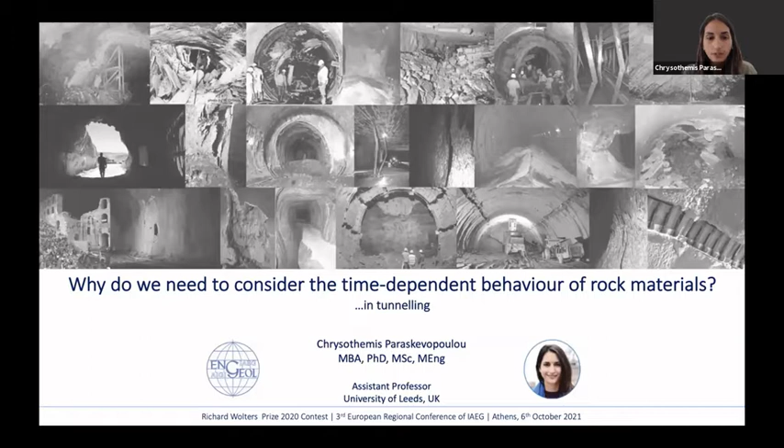Good. So hi everyone, good morning and good afternoon. I will be talking today about why we need to consider the time-dependent behavior of rock materials in the field of tunneling. This presentation is based on key contributions from three submitted articles for this prize, which I'm very proud of. But first, we need to understand the challenge.

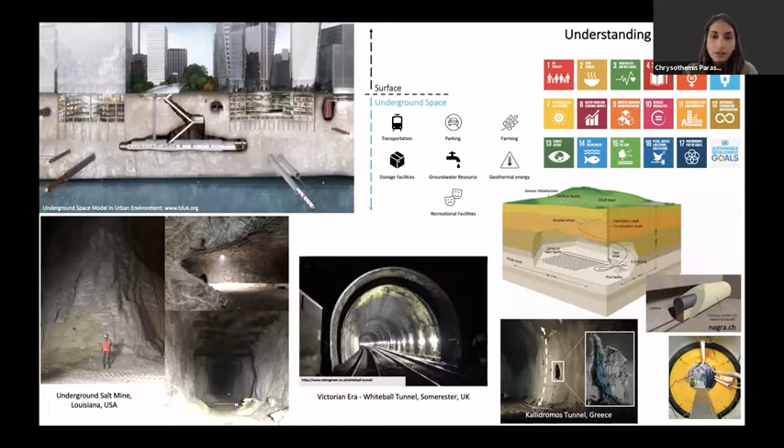You can all agree that underground space has become an integral part of our everyday lives. We use it for transportation, parking, storage, energy, and other activities. But it's time to rethink and reconsider how we design underground structures today, especially when we are requested to design structures that exceed the common lifetime of infrastructure—100, 150 years—to 1 million years. It's also time to reconsider how we can reuse and repurpose existing abandoned underground spaces, prolong their lifetime, or sustain our cultural heritage, like Victorian tunnels in the UK where I'm based.

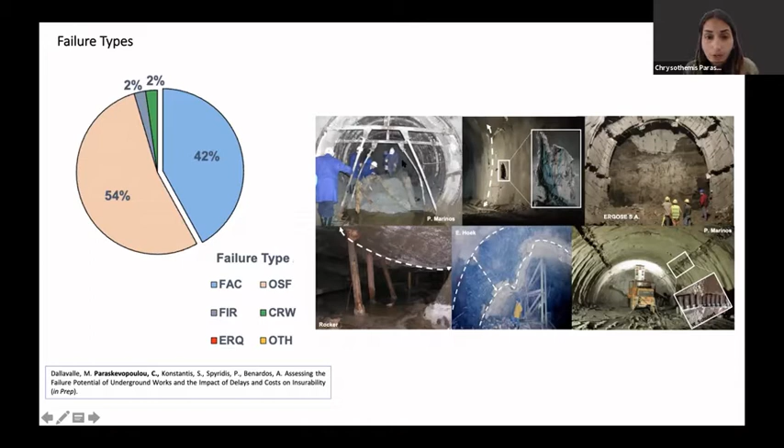Tunneling is associated with failure types, and from a recent publication we've seen that the most common ones are face instabilities and failures due to overstressing of support. Others could be fire, ground failures, earthquakes, and others, but those two, as you can see in the pie chart, govern the main failure types. These are all examples of tunnel failures due to time effects.

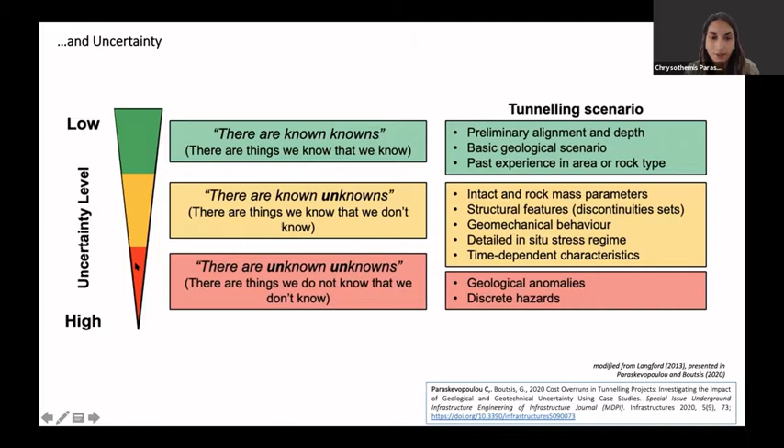So how can we do that? We need to investigate time-dependent phenomena. Time-dependent phenomena can be due either to a change in the state or a change in the property of materials over time. In a tunneling environment, we can see them as physical responses due to creep, consolidation, dilation, swelling, stress relaxation, and strength degradation.

I'm only focusing today on three of these: creep, stress relaxation, and strength degradation. Creep is the time-dependent deformation of rocks and rock masses subjected to constant stresses. Stress relaxation is the time-dependent stress decrease while at least one principal strain is constrained. And strength degradation is the loss of strength due to time.

It's important to highlight that the observed displacement on a tunnel wall, which we can see on extensometers, can be the product of these physical responses that either act simultaneously or individually. So we need to start separating and understanding what we see in this extensometer data.

It's important, and geology matters here, to understand how the materials were formed and how they're going to behave under different conditions, from brittle to ductile materials. How do we do that? By doing testing in situ or in the lab. I'm only focusing on lab testing here.

We need to first set a baseline by doing UCS tests and determine the different stress levels, like crack initiation, crack damage, and UCS. Once we have this baseline, we can change the testing conditions and see how the materials behave over time, looking at creep and relaxation behavior.

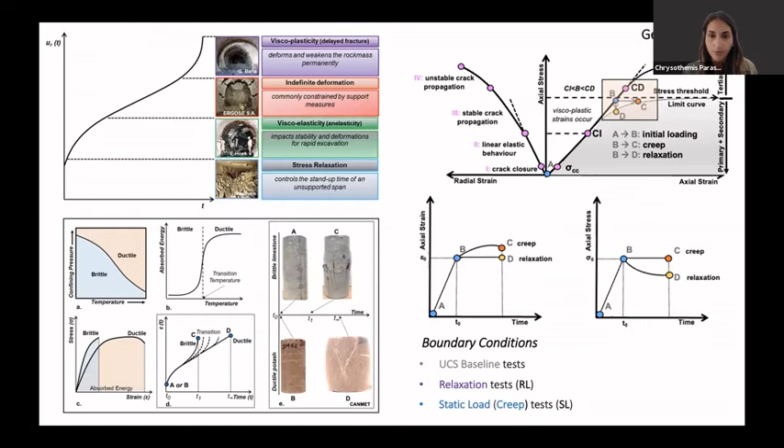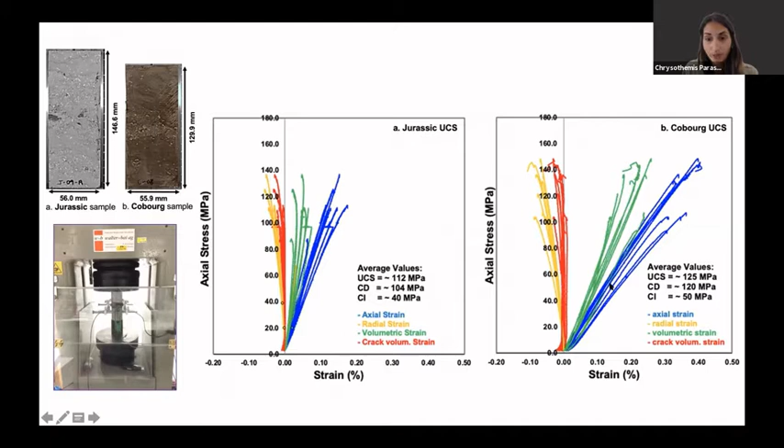In this example, we have two different types of limestone, Jurassic and Cobourg. You can all see from these two graphs that we are talking about strong, brittle materials, and some of you might assume that these are not going to be time dependent.

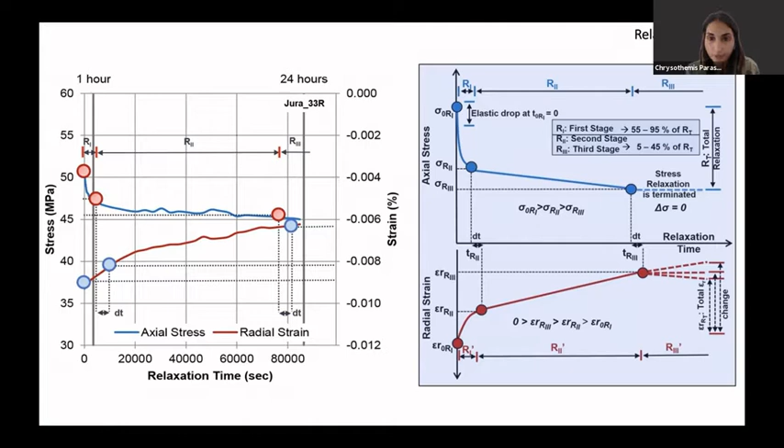If we compare the data with literature review data, then we can start making a database, and by knowing Young's modulus and CI, we can have a better idea of the maximum stress relaxation anticipated.

But the other information we can get is the long-term strength. So we have the short-term strength, which is related to the UCS, and this can decay and degrade over time to the long-term strength, and the lower strength limit would be CI.

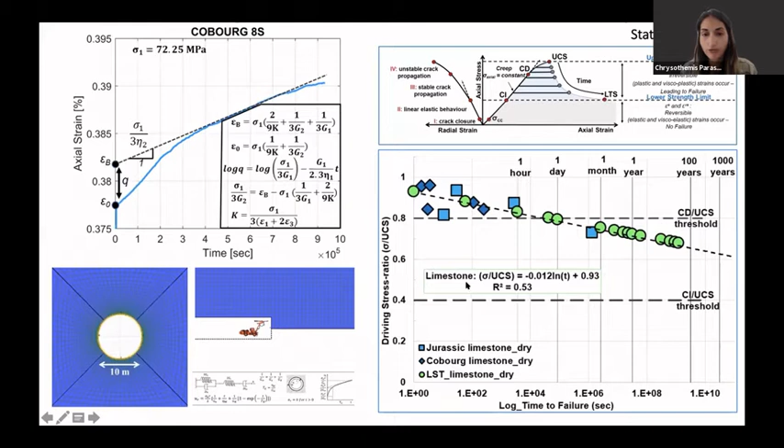So for limestone, by deriving stress ratio versus logarithmic time to failure, we can get these kind of curves, linear here, but logarithmic, where we can use this formula to have a better idea of the long-term strength of such materials.

The observations we made from this testing series was that when the materials are subjected to 80% of the UCS and above, there will be an inevitable failure, crack interaction failure. Between 80 and 40%, failure will occur, but at a later stage, depending on the stress level and the mineralogy. And below 40%, there will be no failure.

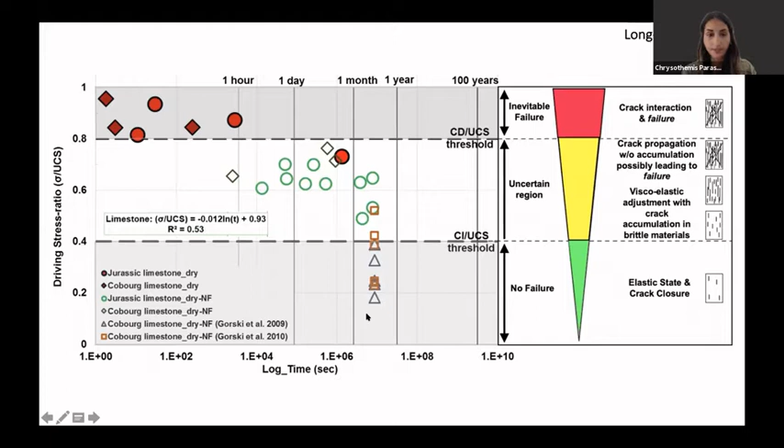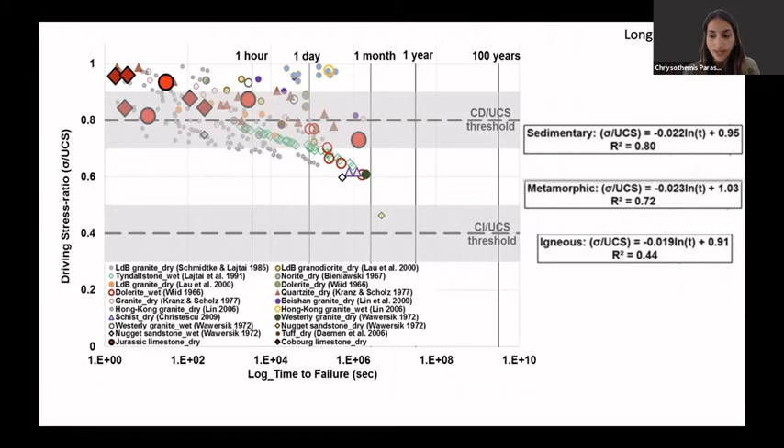When we again compare this dataset with literature review, we can see that they all follow a general, similar trend. If we consider them by different rock types, we can get some formulas that give us a better idea of the long-term strength based on sedimentary or metamorphic rock, even for initial design.

Astonishingly, here you can see what someone would assume, or what is accepted, that granites, most granites, are stronger than limestone, at least these ones that we are looking at here. However, in the short-term strength - however, in the long-term strength, we can see that this trend is reversed. So the limestone can withstand, can have higher long-term strength than granite.

And the reason why is that granite is a polymineralic material, so different minerals, different viscosities, different flow rates that will damage and lead the sample to failure sooner than the monomineralic material of limestone. So this is something to also consider.

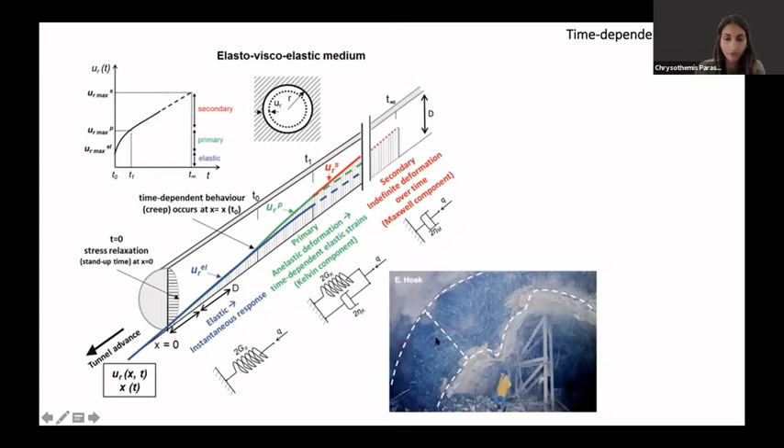If we put this into a numerical framework simulation, we can examine, and right now we are able, with the tools that we have, to consider not only the tunnel advancement and the time effect due to viscoelastic models, but also the duration of each excavation cycle.

So we have real-time simulations, and we can understand how we can go from the elastic to the maximum tunnel displacements, depending on the excavation cycle that we are dealing with. And we can do that both for drill and blast and TBM methods.

What is important to say here is that creep is starting one excavation cycle after we have crossed the face, which is something that we saw both in drill and blast and TBM tunnels.

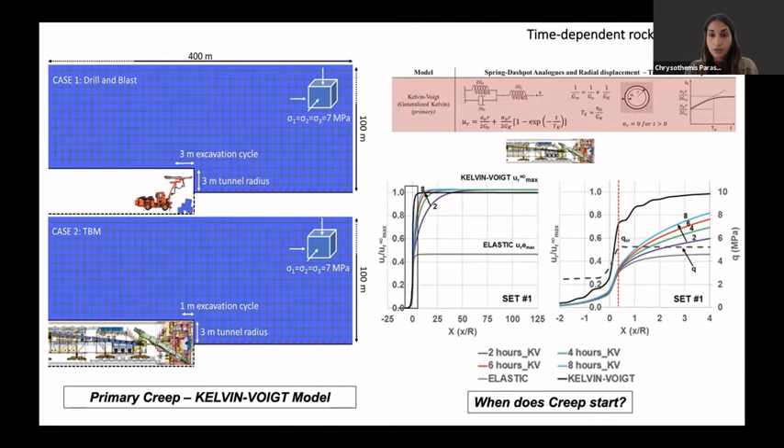So to conclude, I have to say that right now we do have the scientific tools to create practical tools that engineers, engineering geologists, and practitioners can use to take into consideration this time effect in tunneling and in geoengineering in general. I have shown you, from the three publications, key contributions and some key observations from the stress relaxation, creep test, static load test, strength degradation, and long-term strength, and how we can consider time effects in tunneling.

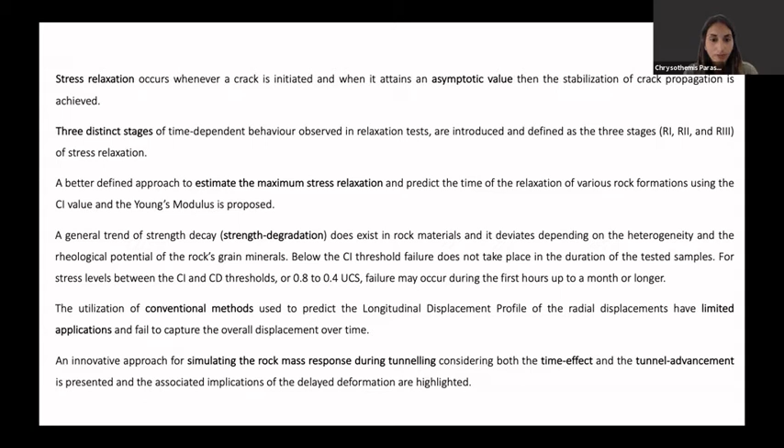So thank you very much. And if you have any questions, I'm happy to answer.

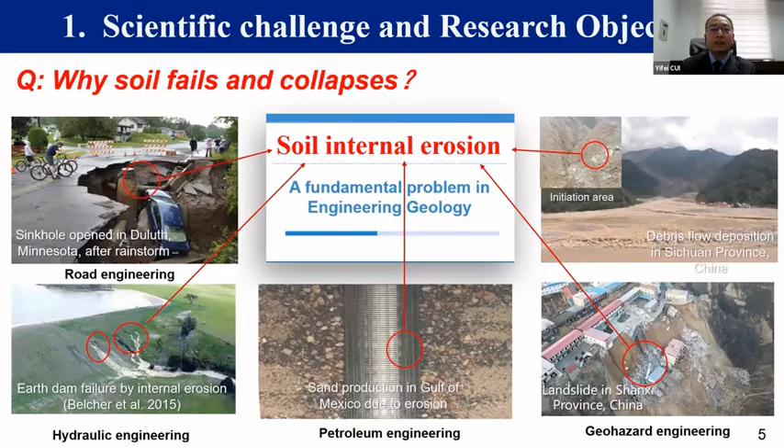Soil internal erosion is a fundamental problem in engineering geology. We can see many geological hazards like landslides, debris flow, and engineering accidents like piping in earth-fill dams. Although each disaster has its own initiation factors, the common mechanism of soil failure is internal erosion. Internal erosion refers to the migration of fine particles caused by seepage force or fluid flow. The interaction between the fluid and soil is the most critical physical process.

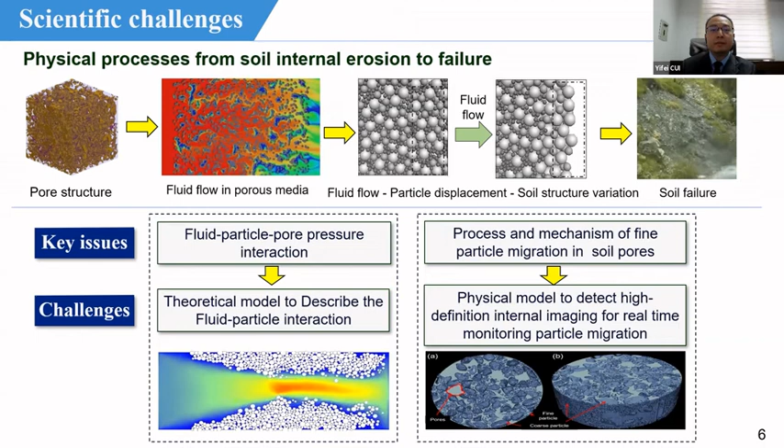Therefore, from a theoretical point of view, the challenge lies in how we simulate the particle-fluid interaction. From an experimental point of view, can we also develop a physical model to detect high-definition internal imaging to monitor particle migration? To tackle these scientific challenges, we proposed several objectives from both theoretical and physical sides, considering pore structure, solid-fluid coupling, fine migration mechanism, and engineering application.

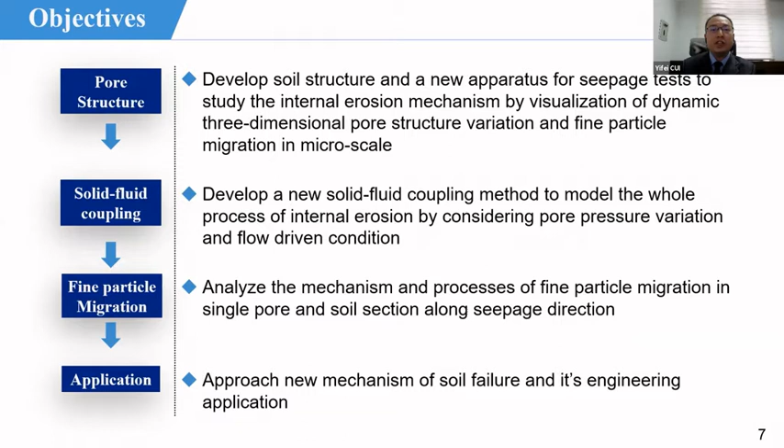I will first start with the achievement by introducing the structure of the soil pore. To study the micropore structure of a typical source material of geohazards, we collected soil samples on site. Then we used the ST method based on SEM to build the pore structure in this study. We consider three indicators of pore structure: pore complexity, 3D Euler number, and pore frequency distribution. We then performed a clogging probability analysis. The results show that the clogging probability increases with increasing pore complexity and decreasing 3D Euler number.

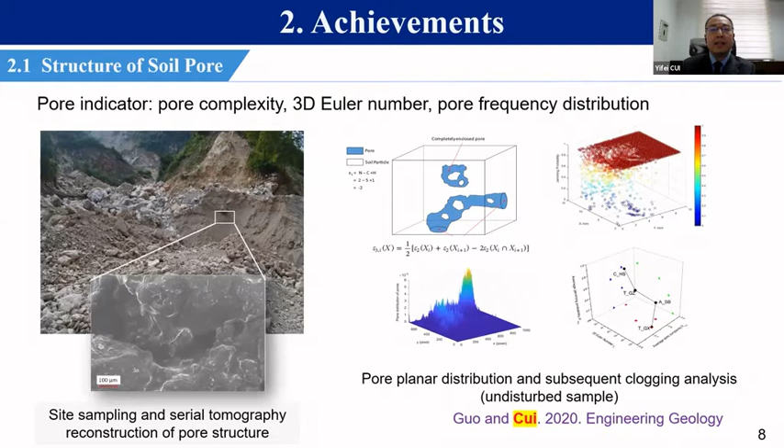For the theoretical development, I will first introduce the categories of solid-fluid coupling analysis. Based on the difference in boundary condition, two categories are identified. The key coupling process is the particle displacement, soil structure variation, and fluid flow change or pore pressure change.

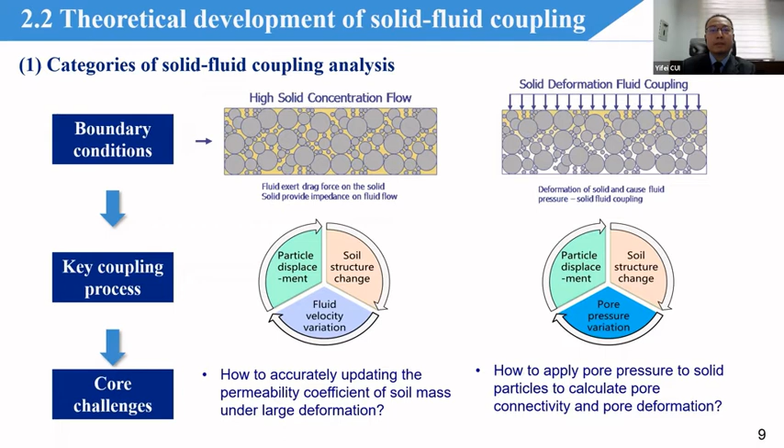Therefore, the core challenges are how to accurately update the permeability coefficient and how to apply pore pressure to the solid particles. We first start with the solid fluid deformation coupling.

When the sample is subjected to isotropic compression, the volume reduction in the pore space will cause excess pore water pressure to build up.

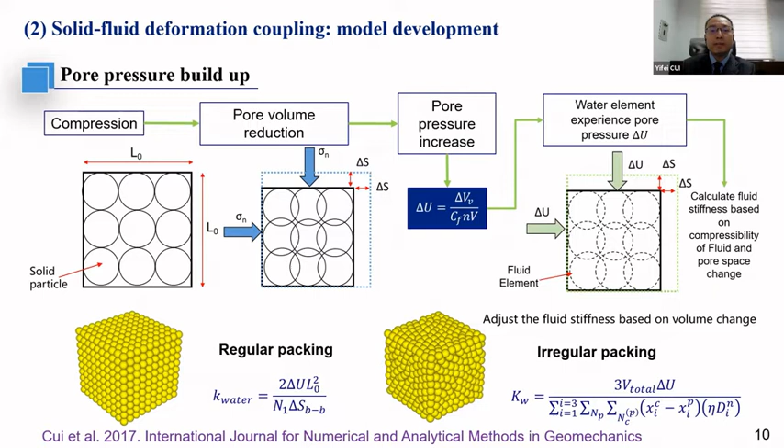Therefore, we introduce a virtual water element to carry pore pressure. The water particle stiffness is then calculated by the compressibility of the water. During the diffusion process, the effective stress is carried by the solid particle and pore pressure is carried by the water particle.

Here, we reduce the water particle stiffness in a certain amount to maintain the expected volume reduction.

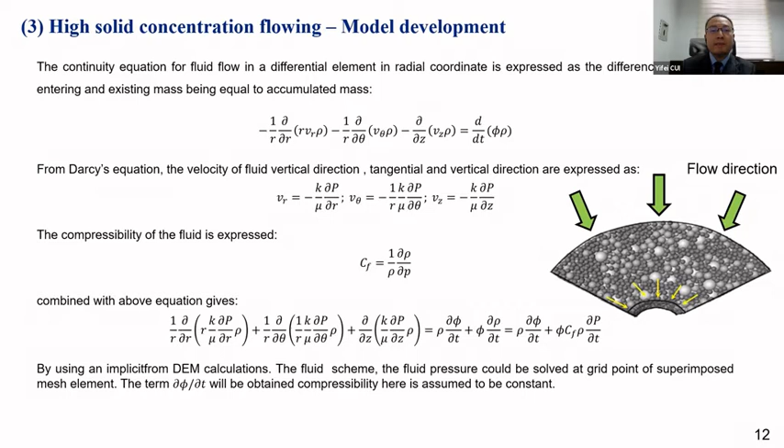For high solid concentration flowing, the continuity equation for fluid flow is expressed as mass conservation. By combining Darcy's equation and the compressibility of the fluid, pressure can be solved at grid points of each mesh element. To update the permeability, we determine the number of particles in the region.

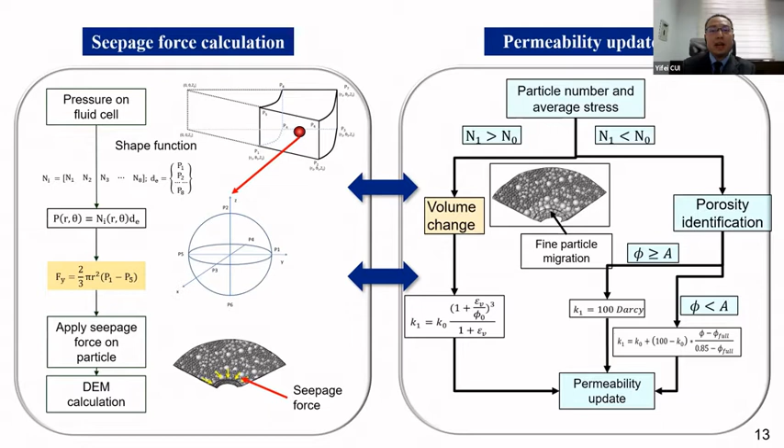If no particle migration is found, the permeability is updated based on the volumetric strain using a modified version of the Kozeny-Carman equation. On the other hand, the permeability is updated based on the measured porosity of the element.

Internal erosion is actually a complicated continuous process which involves particle migration, pore clogging, and continuous washout. All this process will further affect the background mechanical behavior of the soil.

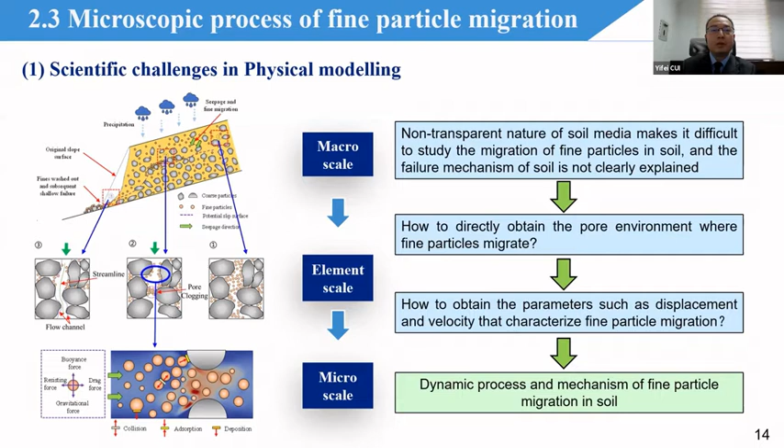However, the non-transparent nature of soil media makes it difficult to study the migration of fine particles in soil. To solve the problem, we developed a seepage device to observe particle migration. We perform 1D seepage tests by controlling the coarse particle size.

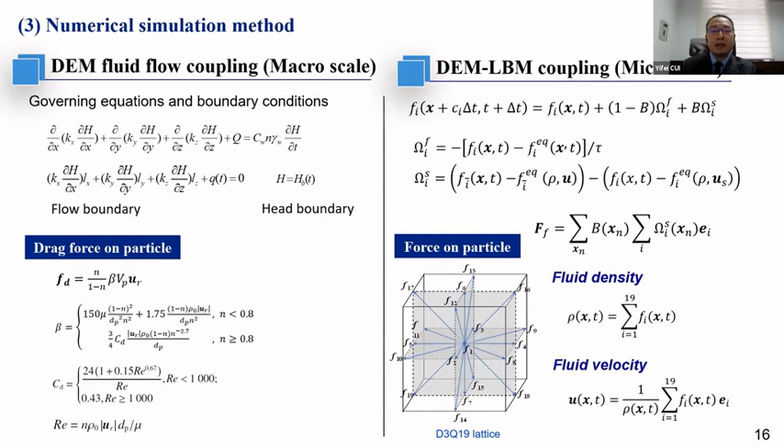For the numerical simulation following the experimental study, we choose the DEM fluid flow coupling for the macro scale and the DEM-LBM coupling for the micro scale simulation.

So we further use the LBM-DEM method to simulate the particle migration process in a single pore to find out the effect of the shape indicator.

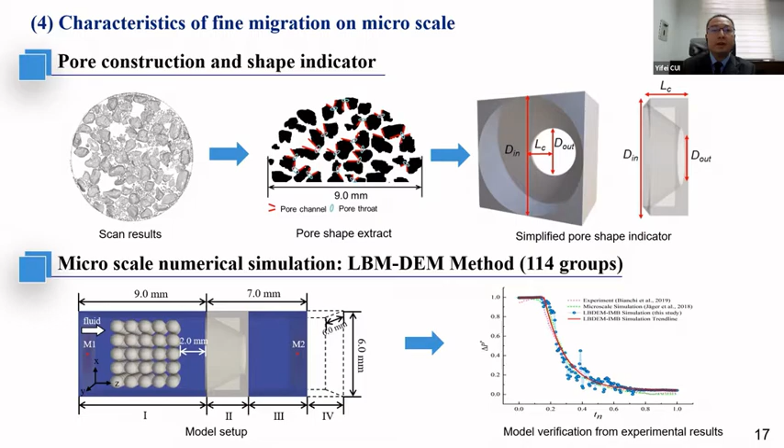For continuous washout, we observe that the particle kinetic energy difference follows a decaying transcendental function before the particle enters the pore. When the particle moves inside the pore, the collision between particles leads to a sudden drop in velocity, which hinders the fluid migration and leads to an increase of fluid pressure on both sides and an increase of particle velocity.

When the particle leaves the pore, the kinetic energy increases with the increase of fluid velocity. The smaller the outlet diameter is, the more intense the particle kinetic energy variation will be.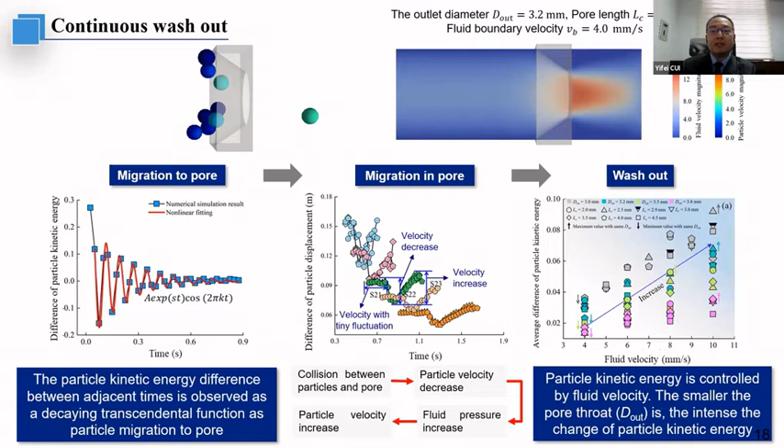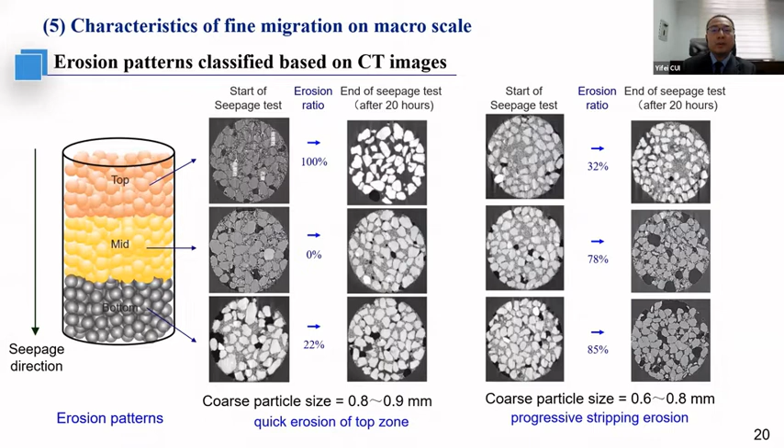Based on the CT result, we observe the cross-sectional degree of erosion on different coarse particles. Larger coarse particle size gives a quick erosion of the top. However, the smaller coarse particle size gives a progressively stripping erosion.

In order to further clarify the dynamic characteristics of the eroded particles, we simulate the whole process using the solid fluid flow coupling method. The comparison of the CT and numerical simulation results shows almost the same erosion ratio, which shows the capability of the numerical model.

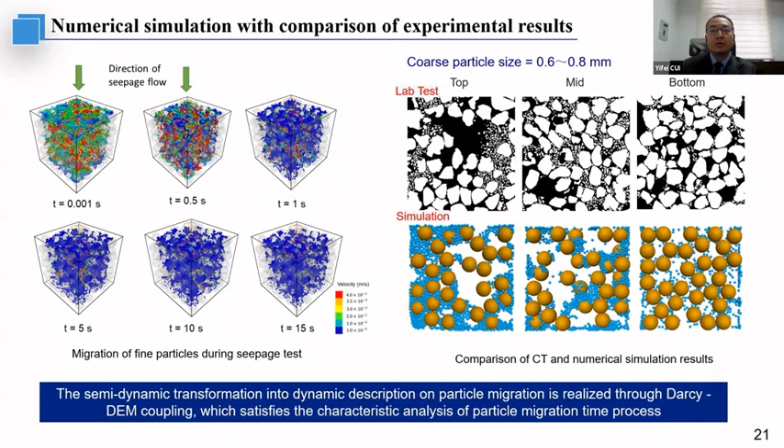We also found that the larger the average pore to fine diameter ratio is, the greater the probability of particles passing through the pore. The fluctuation of particle transport will first increase and then decrease, which will cause the pore pressure to increase and soil strength to decrease.

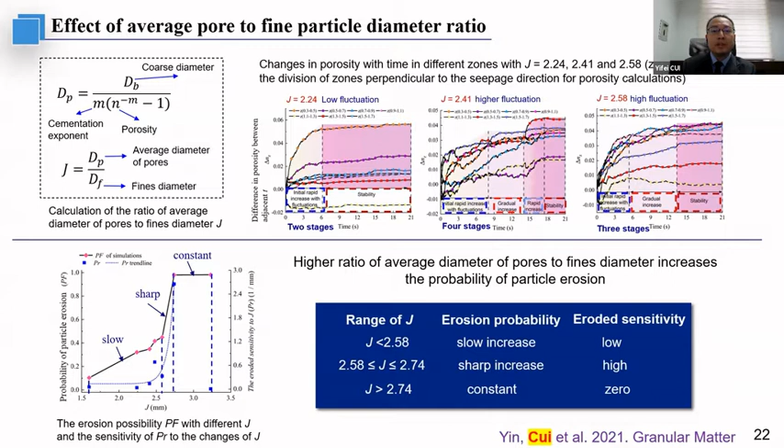For the engineering application, we use a flume model under rainfall infiltration conditions to study the initiation process of slope failure. We identified that some soil pores are blocked by the migrated fine particles.

The fine particles accumulate at a certain layer and form a relatively impermeable layer, and the pore pressure will increase and the soil strength decrease, and we will observe the subsequent soil failure.

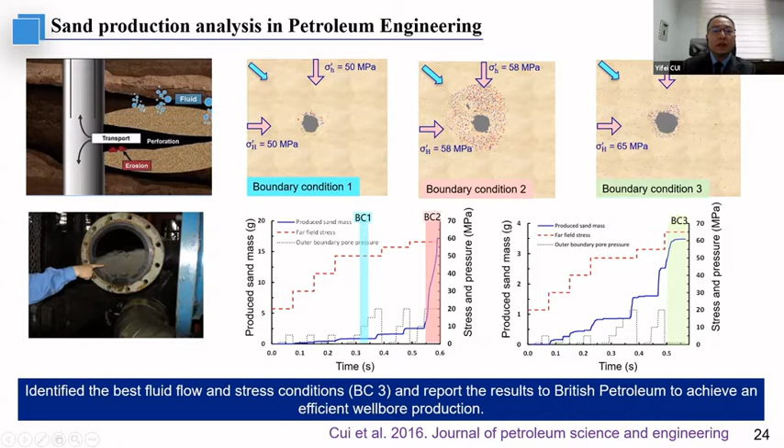We also apply our developed numerical method on sand production analysis in petroleum engineering. We simulated the sanding on a hollow block sample. We identified the best fluid flow and stress condition and reported the result to British Petroleum to achieve efficient wellbore production.

Here is the conclusion of the achievement. By using the constructed pore indicator and newly developed numerical method, we explain the process and dynamic mechanism of fine particle migration and apply our knowledge to other engineering fields.

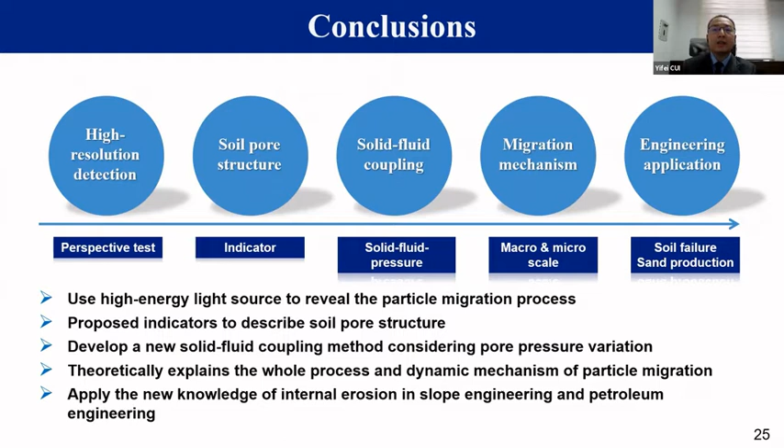We have published 40 ESI papers, including 5 ESI highly cited papers and 1 hot paper in Web of Science, and were awarded the leading technology prize by China Association of Science and Technology, as well as outstanding reviewer for Computers and Geotechnics.

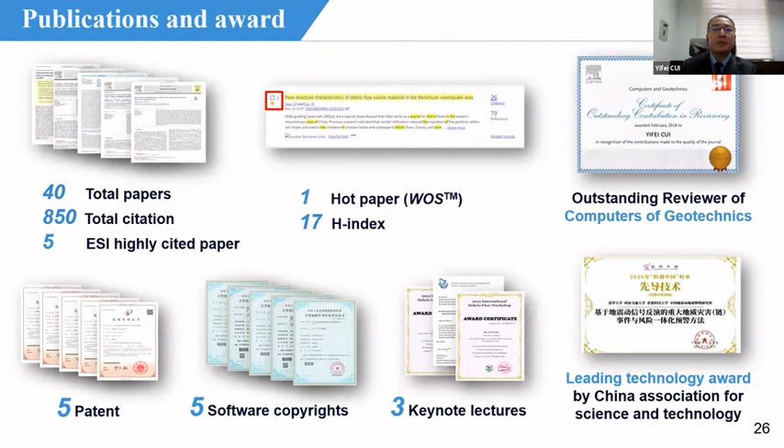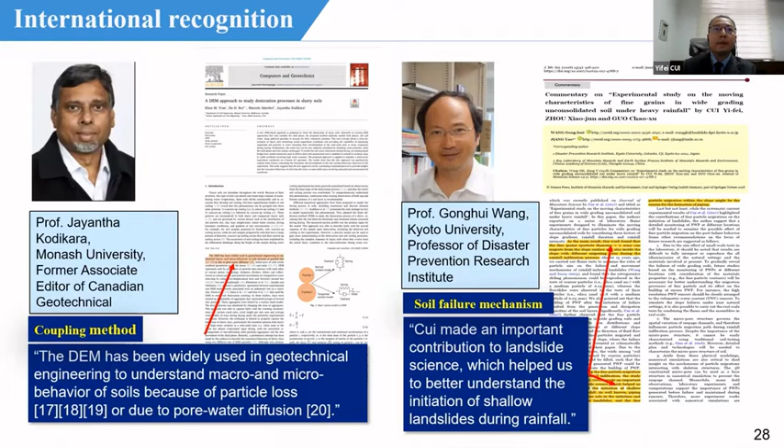We will combine microscale numerical analysis with test data, using machine learning to build a nonlinear mapping between soil deformation and fine particle migration. We hope we can provide a new method under the continuum theory analysis framework.

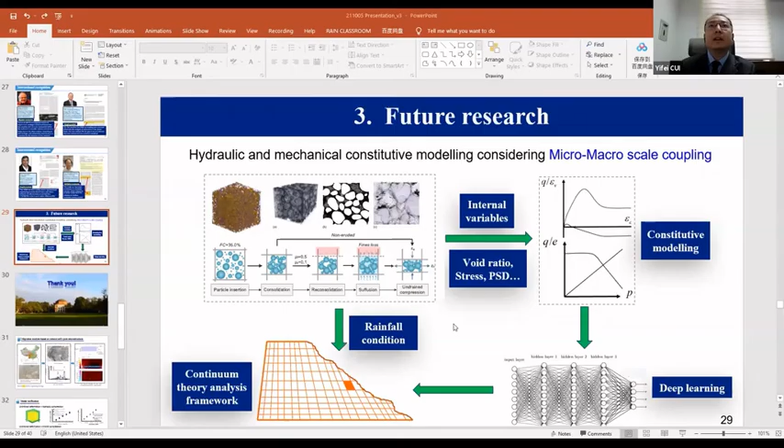The cementation in the LBM-DEM modeling is just adding a segment between the particle boundaries to form a segmented particle. This is very familiar in DEM study, which is called the segmented boundary, cohesion, or parallel bond, so we can add that in.

So I think this is a very good opportunity for our future study. Okay, thank you very much.

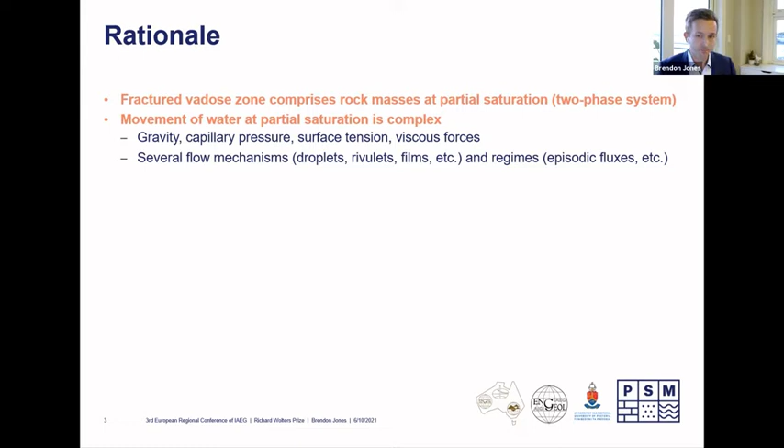That leads to several types of flow mechanisms and flow regimes that we see within the fractured vadose zone. Now, remember when we collect data for our rock mass models, we tend to go into a lot of detail describing our discontinuities, and this helps us infer strength, better define the strength of the rock mass. But for groundwater, we tend not to do that.

In current practice, groundwater assessments are really based on a simplified bulk system. What that means is that we tend to view the entire system in terms of fracture networks. We look at compartmentalization, we focus on flow boundaries. When we talk about discrete fractures within that system, we oversimplify to smooth parallel plates.

And that just shows you what it is. Flow through a discrete fracture is simplified to smooth parallel plates, and water flow is quantified using the cubic law, which assumes that these parallel plates are impermeable, and the flux is proportional to the cube of the fracture aperture.

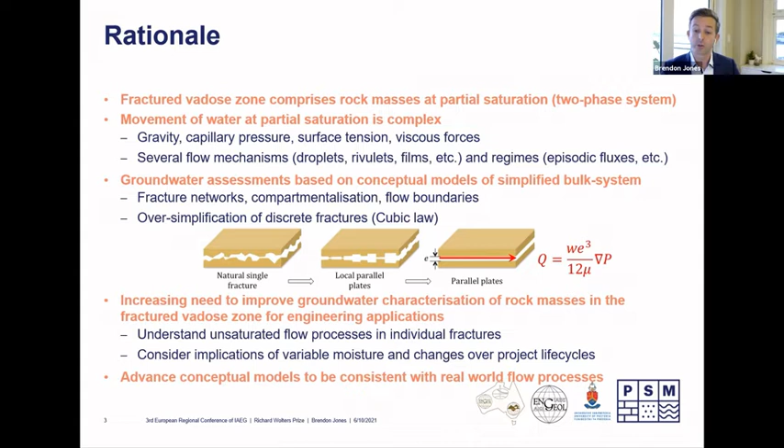So for many applications in the fractured vadose zone, we need to better characterize our rock masses and the implications that variable moisture has on our projects. This will start at the discrete fracture scale, which will hopefully ultimately lead to an improvement of our conceptual models that are consistent with real-world flow examples and flow processes that we observe.

The ultimate aim was to advance the conceptual understanding of variably saturated flow through discrete open discontinuities, in terms of its application and applicability to engineering applications. The research was primarily split into two portions.

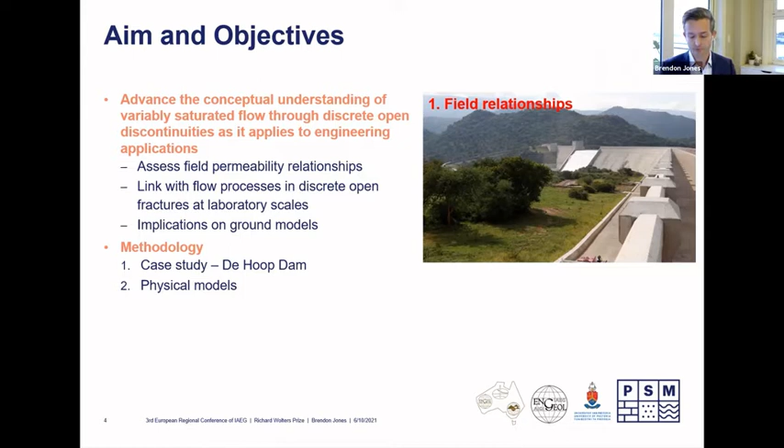The first was a case study from a newly constructed dam site in South Africa, where we looked for field permeability relationships. Those relationships were then used as input to guide a series of physical models in the laboratory, leading to flow visualization experiments and a better understanding of flow through discrete fractures. Due to time constraints, I'm only presenting selected experiments, and everyone is referred to the publications for further details.

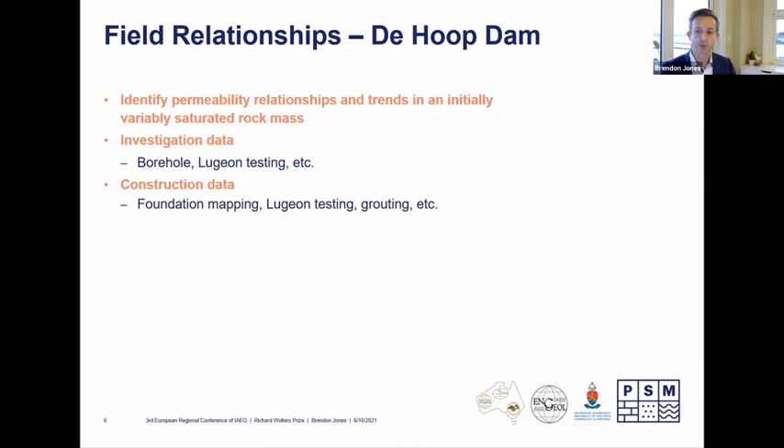So what about the field relationships? Let's give a brief overview of the case study. We used investigation and construction data from De Hoop Dam. The dam wall itself is about 1 kilometer long, and at its highest point it's about 80 meters high. It's a roller compacted concrete gravity dam.

The engineering geology of the dam consists mostly of gabbronorite. It's located within the Bushveld Igneous Complex in South Africa, one of the largest layered intrusive complexes in the world, where a lot of platinum mining takes place. The structure of the foundation rock mass was largely controlled by a regional fault running about 500 meters north of the site, which dictated the structure we see.

Typically there were three prominent joint sets. There was a sub-horizontal joint set due to the stereotypical layering of the Bushveld Igneous Complex, but also to some degree stress relief joints from lithostatic unloading. Then there were two sub-vertical joint sets. Joint set 3 was parallel, or subparallel, to that larger regional fault, whereas joint set 2 was oblique to that fault.

In general, the rock mass quality improved towards the river section, with an associated decrease in permeability. There were localized poorer zones around the river, associated with large-scale faulting and dolerite intrusions. But overall, rock mass conditions increased from the upper left flank through to the lower left flank and then to the river, with some localized poor conditions.

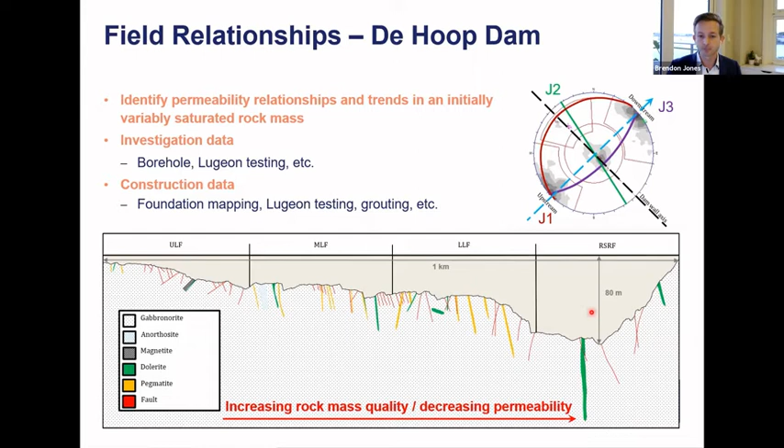So what were the relationships we identified? There were two very important relationships we needed to target going forward. One was the influence of defect orientation. We looked at the permeability data from Lugeon testing in the investigation phase, as well as during the construction phase which preceded grouting. There was foundation mapping available to us, boreholes from the investigation phase, and all the grouting data.

A comparison of those data sets found that foundation blocks with prominent vertical joint sets had a poor correlation between the permeability and grout data sets, and generally had an unsuccessful primary grout hole. Whereas foundation blocks with predominantly horizontal or prominent horizontal joint sets had a good correlation between the permeability and grout data, and the primary grout hole was generally a success.

So what did that mean? Does that mean we need to start thinking about the influence of defect orientation on permeability assessments in unsaturated rock masses?

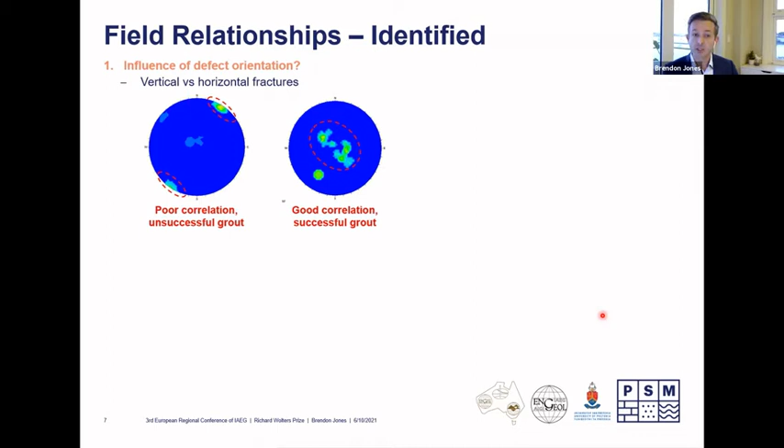Now, a point of clarification: this type of project is very nuanced in terms of what can cause these correlations, but we really wanted to look at these potential trends and test them within what was an initially unsaturated rock mass, which after reservoir impoundment became saturated, particularly since there were some leakage problems needing remediation in the mid to upper left flank, where conditions were initially unsaturated.

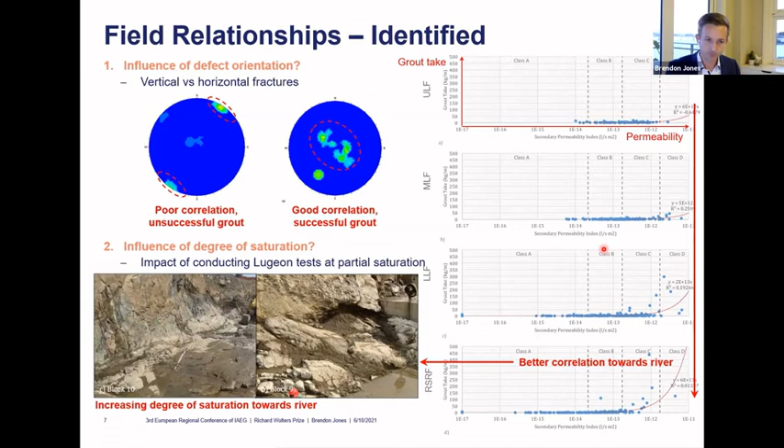So based on those field relationships, we wanted to specifically target those questions. Unsaturated fracture flow is a fairly poorly understood topic. It made some strides at the Yucca Mountain nuclear storage facility up until about the mid-2000s, then it tapered off, and really in the last 5 to 8 years it's picked up again.

So we really went back to basics, looking at smooth parallel plates and the influence of unsaturated conditions on those. We wanted to look at the influence of orientation, so we had horizontal and vertical fractures in our experiments, and the applicability of the cubic law.

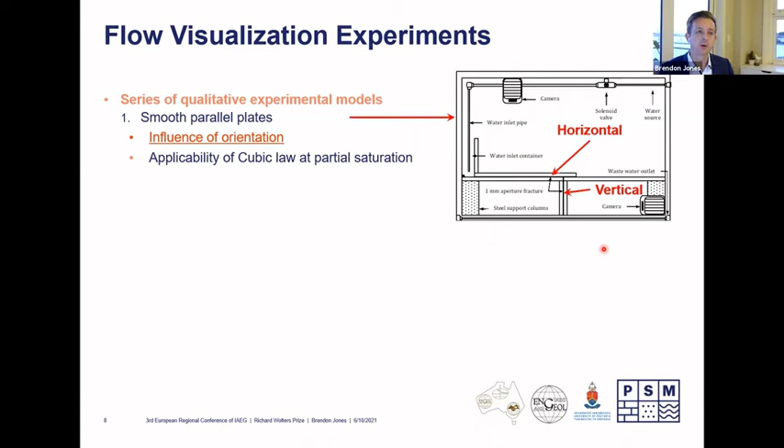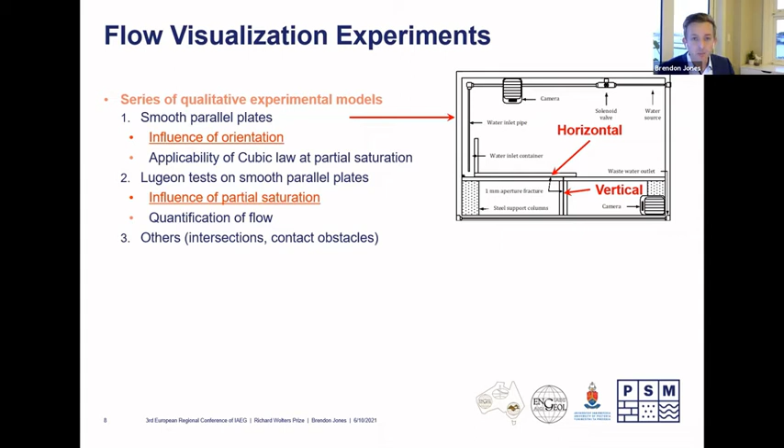Then we also looked at conducting Lugeon tests under the influence of partial saturation and how that flow can be described. There were a series of other tests - we looked at fracture intersections, we incorporated some contact obstacles, but largely they corroborated these tests, so I won't go into those for the sake of time.

Just in terms of the Lugeon test, that was our conceptualized model. We really tried to mimic a packer testing interval with a discrete fracture intersecting its base. The materials were made of transparent acrylic plexiglass sheets, to isolate unsaturated flow dynamics. The fractures were open, no geometrical complexity at all, no infill.

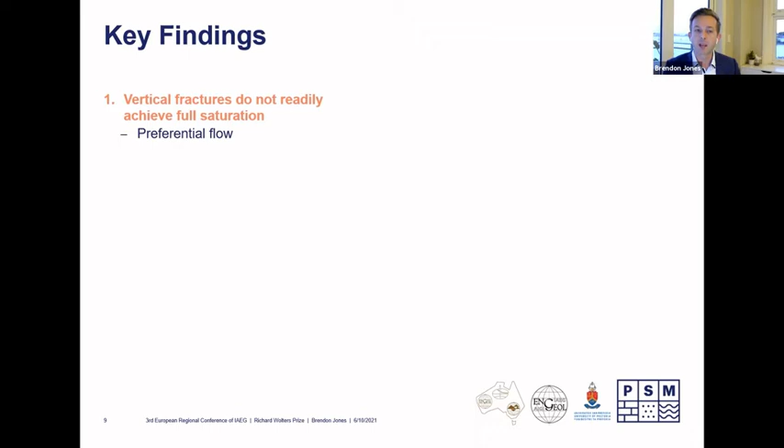Some of the key findings here were that vertical fractures didn't readily achieve full saturation, and the cross-sectional area of those vertical fractures was predominantly, within the minority of the cross-sectional area, comprised of preferential flow. So we had low degree of saturation in all of the vertical fractures that we tested.

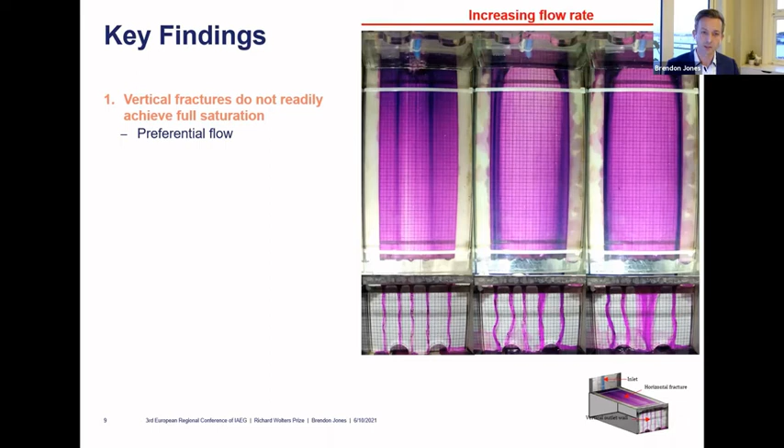If you look at this example here, which is an increasing flow rate from left to right, we can see that there's preferential flow in that vertical fracture. There are rivulets, oscillating rivulets as we increase the flow rate. There's some film flow, which are typical unsaturated flow mechanisms that we expect. The oscillating rivulets and that wavy film flow indicate some tortuosity within the flow path.

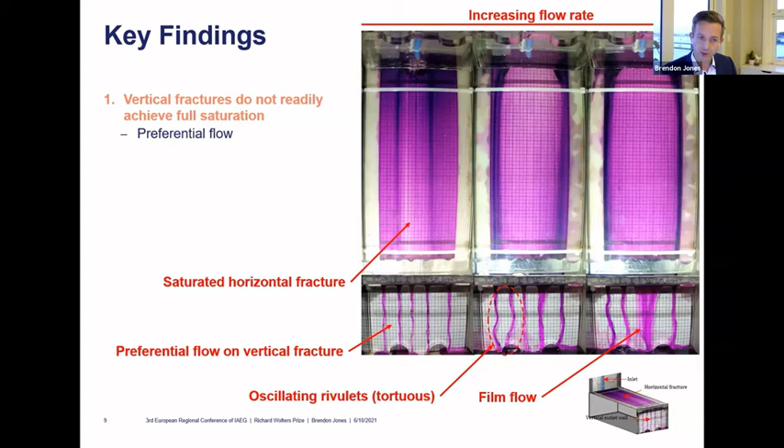And the vertical fracture didn't saturate despite being fed from a saturated horizontal fracture. Does that mean we need to consider something like the continuity principle, where vertical flow occurs at much higher fluxes given that low degree of saturation? We have a full width horizontal fracture that's saturated, so that same volume of water needs to be transported in the vertical fracture at lower degrees of saturation. The linear velocity must be driven up to accommodate that decrease in saturation. Most importantly, the cubic law assumptions in this case are invalid, but yet there's no proposed alternative.

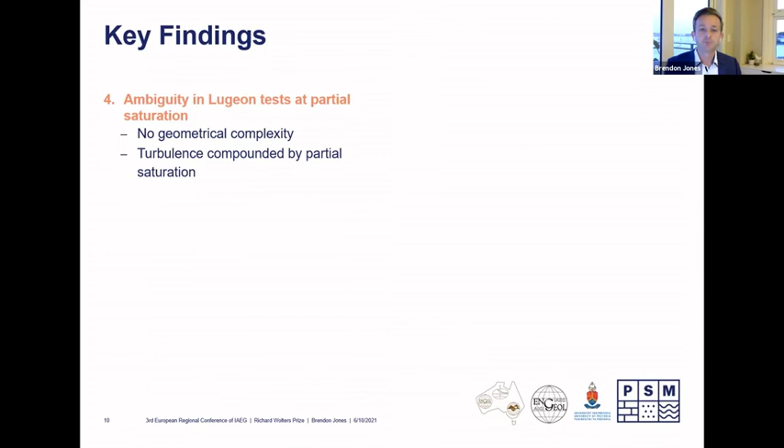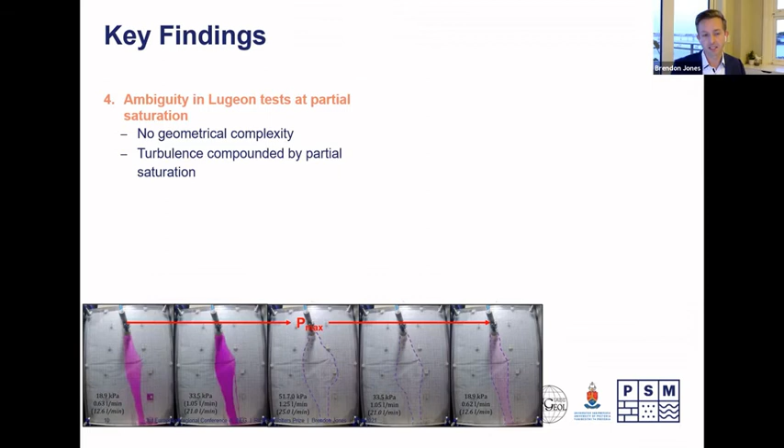Moving on to some of the findings from the Lugeon tests at partial saturation. Here's an example from one of the tests conducted on an inclined fracture, a single discrete inclined fracture with a 0.5 millimeter aperture. Again, it was not fully saturated as we increase our ascending pressure levels to Pmax and then subsequently decrease them.

If we plot our Lugeon test graph, we can see that we would have called a turbulent flow behavior when interpreting Lugeon tests. Now, turbulent flow is typically associated with geometrical complexities within the fracture and within the rock mass by the formation of eddies. But what this told us is that perhaps partially saturated conditions can also contribute or compound the turbulence of fluid flow.

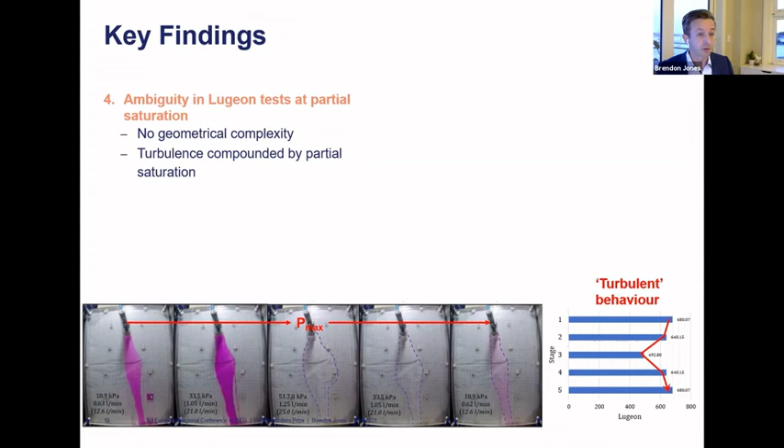So calculated flows using the Forchheimer law compared very well to our measured flow rates in the laboratory. What are the implications of this? Well, first is obviously the presence and interaction with these preferential flow paths and excavations within our projects. But most importantly, in terms of our site characterization and really defining our engineering geological model.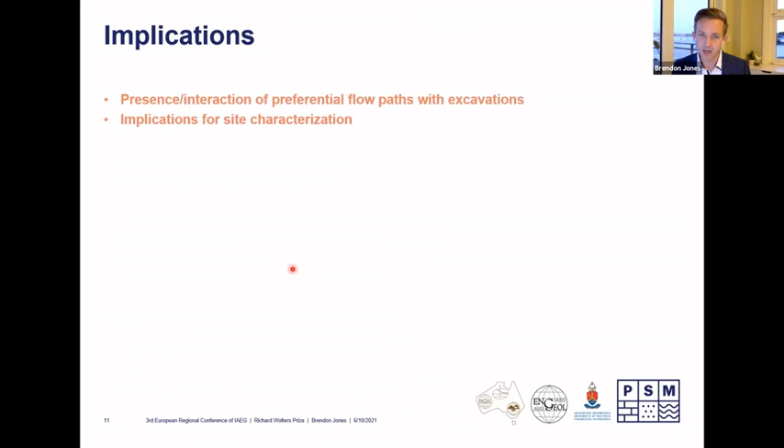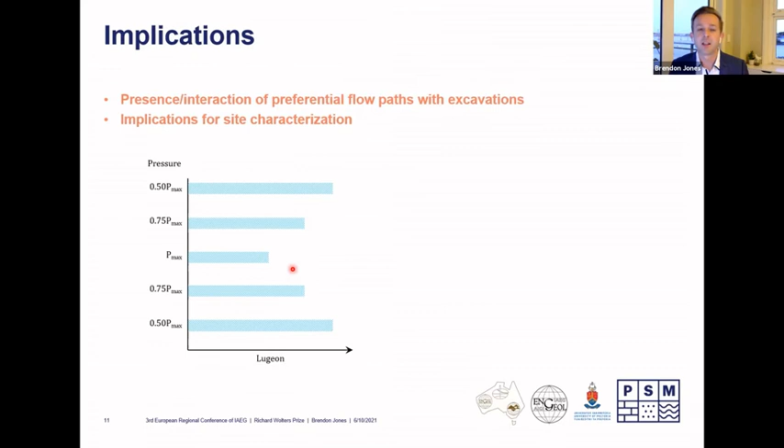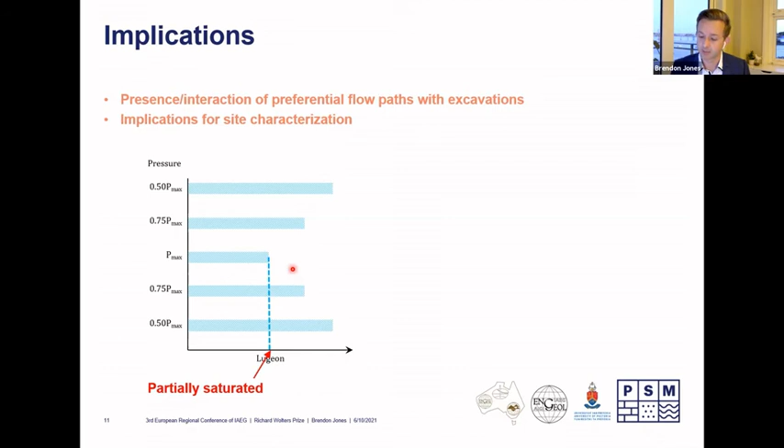So if we are testing within the unsaturated zone or within that fractured vadose zone, if we consider that we have a discrete unsaturated fracture that essentially exhibits this turbulent flow behavior, well, we'll assign a Lugeon value under those partially saturated conditions. But if we come back and that same fracture is considered fully saturated, we're likely to see a bit more what we term laminar flow. So we may assign a Lugeon test that's higher under that same fracture being saturated. So there's this ambiguity in our flow behavior and assigning our Lugeon value.

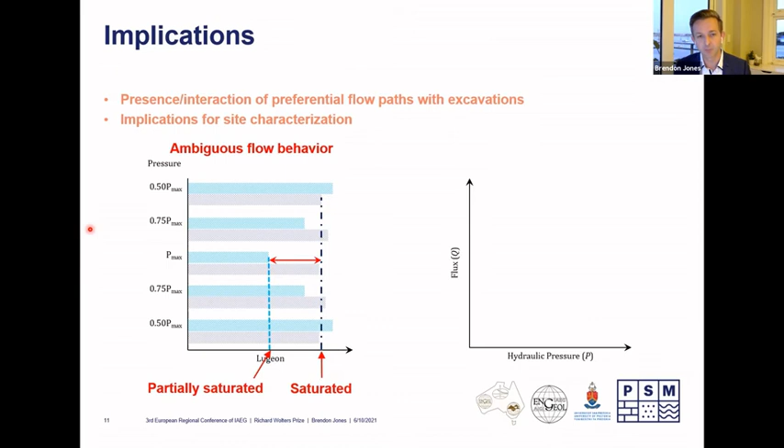If we consider the same scenario doing the PQ diagram, let's assume we go out and do our site investigation and conduct our Lugeon tests on a discrete fracture that is initially unsaturated. We may get this nonlinear flow due to those two-phase conditions.

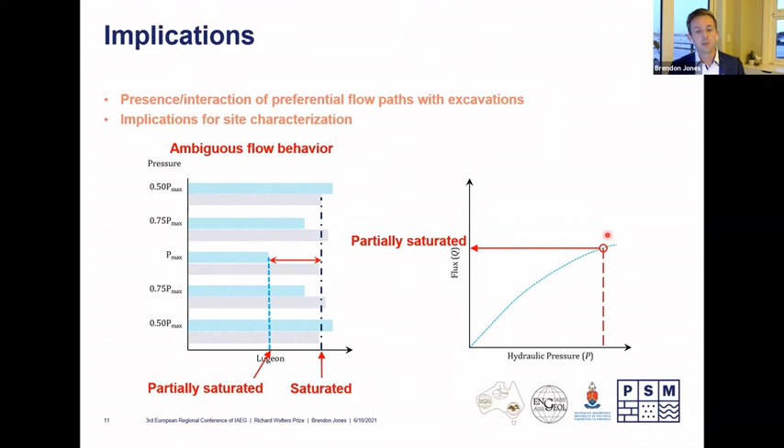We may assign or calculate a partially saturated flux that may occur under a given hydraulic head. So if this was for our dam site, for instance, we may conduct this at the expected pressure head of the dam. But upon reservoir impoundment, we may start to get linear flow, and that flux at saturated conditions is much higher. So is this leading us to incorrect quantification of the flux over the project life cycle?

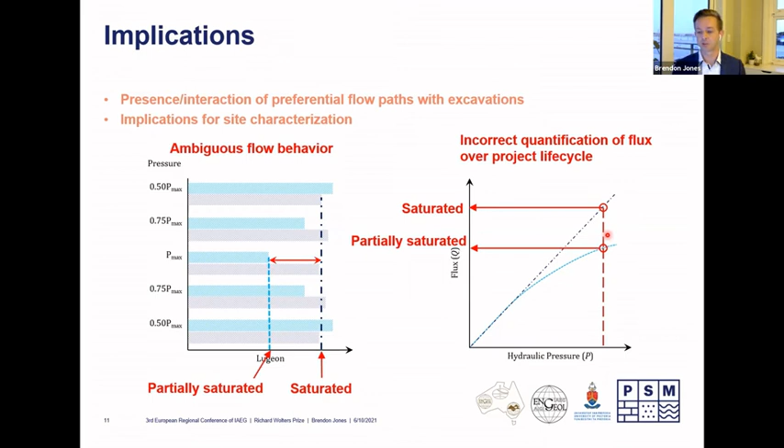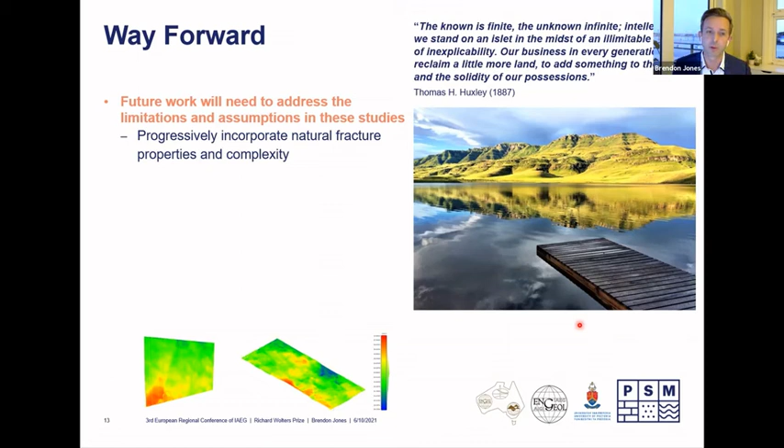Just to conclude, with all research there is definitely a way forward, driven primarily by the limitations and assumptions of this work. We need to progressively incorporate natural fracture properties and complexity, which has to some extent already been done and continues to be done, looking at contact obstacles, roughness, different material properties, and infill. We'll need to link processes at different laboratory scales, from small scale to meso scale laboratory experiments, and then further link that to field processes by conducting larger controlled field experiments.

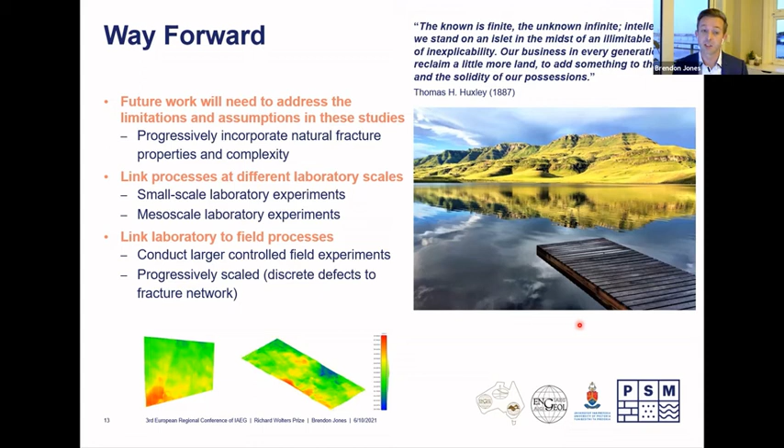And looking at discrete defects through to the fracture network, all of these need to be done at varying flow conditions.

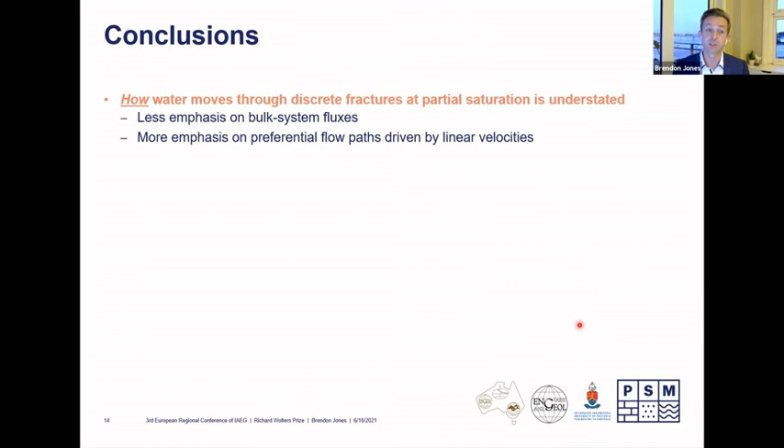In conclusion, how water moves through discrete fractures at partial saturation is very much understated. We need more emphasis on these preferential flow paths that are driven by their linear velocities. We need more studies to get a unified view of unsaturated flow dynamics. We need to isolate each of these individual processes and link them, because ultimately building a suitable representation of a realistic fracture system is very difficult.

But this research has at least shown some preliminary answers to explain flow deviations from common saturated approaches, which are shown to be incorrect, and that flow mechanisms within the fractured vadose zone are very complex. Our bulk systems approaches do not contribute to fundamental research, and we really require deeper understanding of small scale processes. The implications of these complex moisture dynamics in the fractured vadose zone affect projects throughout their life cycles.

Thank you very much, Brendon. Any questions from the jury? If not, I have one question.

Your Lugeon values, for what time of injection do you have these? Because the time of injection is important with regard to the saturation on one side. And it's also interesting and important for the aperture, because the bigger the aperture is, the more water will flow, especially at that place or through this aperture. So what is the relationship between both?

We didn't investigate that within the case study itself, but yes, of course, conducting Lugeon tests, you do tend to clean the hole and saturate the rock mass at least around the borehole before conducting it. But it's really about understanding those preferential flow paths that are controlled primarily by fracture aperture. As soon as we have a larger or increased fracture aperture, it's gravitational forces that start to dominate as opposed to capillary forces. So to go back to your question, the Lugeon testing time in the case study was 10 minutes per stage.